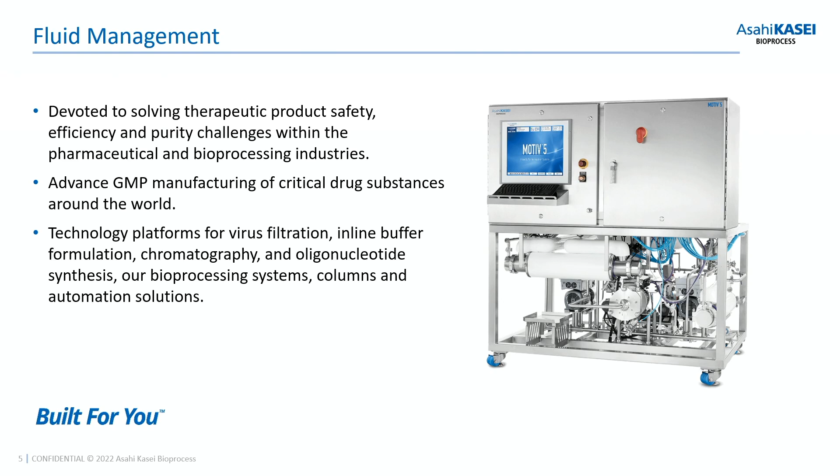We firmly believe that a rising tide lifts all ships, and that's why we're investing so heavily in these collaboration efforts like BioPhorum. The fluid management division is devoted to solving therapeutic product safety, efficiency, and purity challenges within the pharmaceutical and bioprocessing industries. Our goal is to advance GMP manufacturing of critical drug substance around the world, and we do that with a variety of technology platforms, including equipment, but also automation integration solutions.

Oligos are one of the most promising therapeutic modalities for today and the future. AKBA has been supporting oligo manufacturers and developers with equipment from synthesis to purification since 1998. And our aim is to help manufacturers around the world meet this growing demand for oligo drug substance.

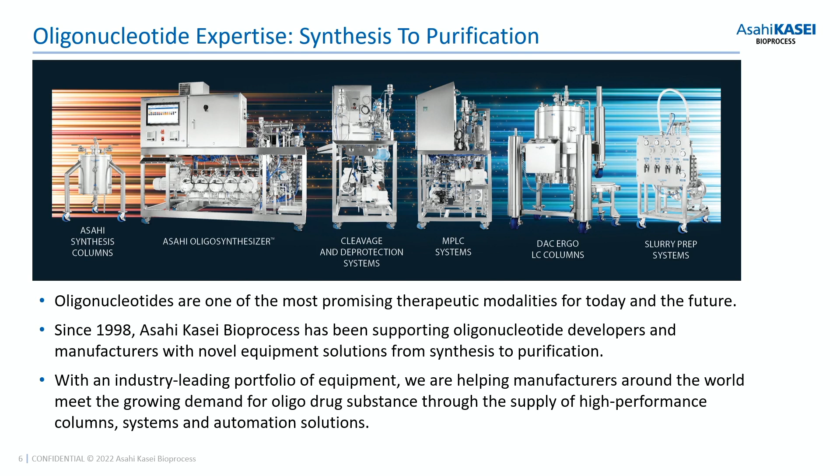We get down to the roots a little bit. Pharma 4.0, coined by the International Society for Pharmaceutical Engineering, or ISPE, is a specific introduction of Industry 4.0 concepts to the pharmaceutical industry. The term Industry 4.0 refers to the so-called Fourth Industrial Revolution, which you might imagine is preceded by the first, second, and third industrial revolutions.

I threw some dates on the slide, but the boundaries of these periods are defined differently by different groups, and that's because, of course, especially in the early technologies, regional adoption is very different depending on where you were. But broadly speaking, we can agree that the first industrial revolution was defined by early mechanization, such as steam power in the weaving loom, the second by mass production with the assembly line and electrical energy, the third by automation and electronics, and the fourth and current industrial revolution by the Internet of Things and broad-based networks.

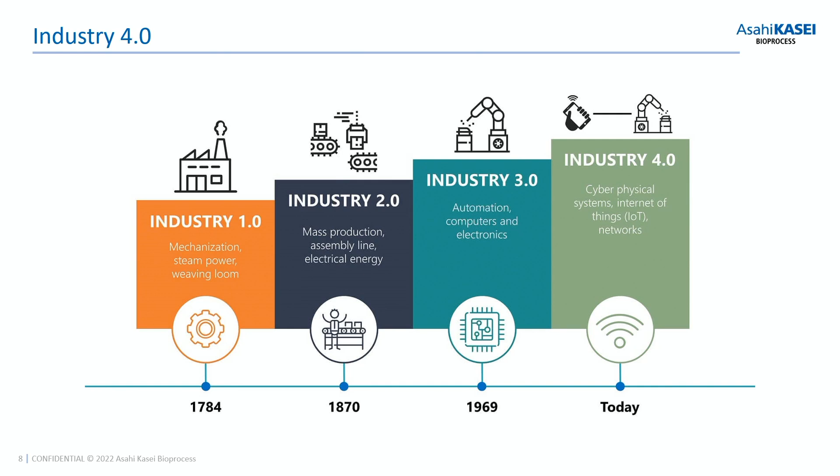Pharmaceutical production based on Industry 4.0 factory design really becomes Pharma 4.0 when these ideas are applied to GMP validation and GAMP requirements. Pharma 4.0 is not a product, but rather a framework that consists of many elements and enablers. The elements here being resources, information systems, organization and processes, and culture, and enablers being digital maturity and data integrity by design. This operational model is applicable to processes all the way from initial product development up to commercial manufacturing.

It's important to note that this digitalization effort, while it uses a lot of IT jargon, is not an IT project. It's really important that this project is a project for your entire organization. This model requires information exchange both vertically and horizontally throughout your plant, and that means that all departments and stakeholders need to be involved. They really need to collaborate to properly identify your CQAs, critical quality attributes, and your CPPs, critical process parameters, which are tenets of the ICH Q10.

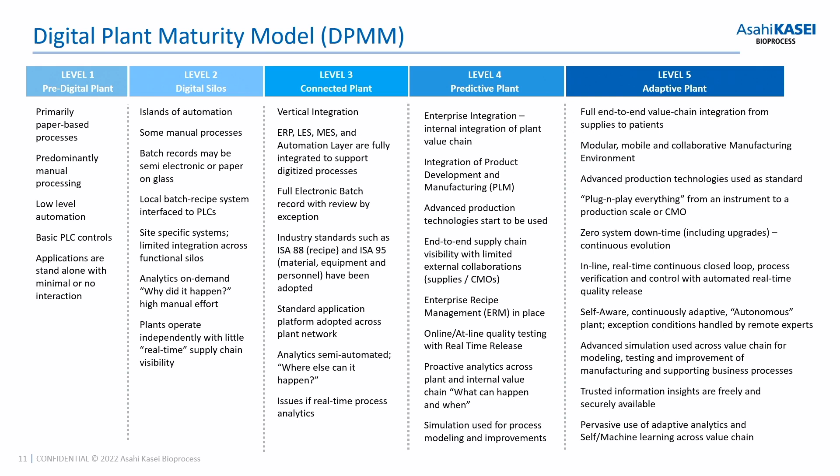It provides a great summary of some different levels of digitalization that we see across the industry, and that might be helpful for you to evaluate where your plant currently stands and where you want to be. And maybe that goal is a level 5 totally adaptive plant, and maybe it's not.

As we look at those levels, 1, 2, and 3 are easily recognized, I think, for most of us. Moving from paper-based processing to islands of automation, and then finally to full-blown DCS control in level 3 with ISA-88 concepts, control of multiple unit operations, et cetera, as are elements of level 4, such as inline quality testing, process simulation and modeling, and things like that. As such, you might not be surprised to find that BPIT conducted a survey, and they found that most pharma companies are at level 2 or 3 and incorporating some elements of level 4.

Of course, before we propose a digitalization project, we have to understand what the benefits are. I've summarized a few here. The first being quick access to data and real-time reporting, which of course supports your critical management decisions. This technology is intended to support your workforce. It helps with operator training, it reduces human error, and it gives them the information that they need to identify issues and gives them feedback, for example, to the maintenance team to minimize downtime. It helps minimize data loss with robust backup technologies, which helps you prevent throwing away good product.

Another key point, it prevents equipment obsolescence. Right now, a lot of equipment is made obsolete because it applies to a bespoke product, or it relies on institutional knowledge about the process or about the equipment. That means that if those people move up in your organization or they leave your organization, it leaves you reeling.

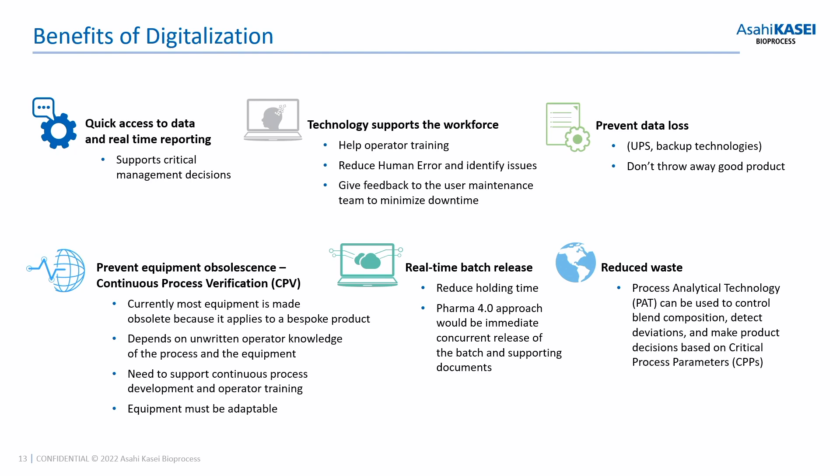I think that automation is easiest to identify in terms of a benefit at the process level throughout existing plants. Processes that were formerly manually done are now being automated, and even very simple unit operations have a huge benefit to automation in the fact that you have data continuity and continuity of reporting. So even though that might not save you that much time in that unit operation, it does enable you to take the same electronic batch report approach, all the same reporting approaches that you have in your surrounding technologies that might be more complex, and that can really save you time in analysis and QA, and it supports your customers' need for the data.

I want to pick on a few technologies that I think are overlooked, specifically in the oligo industry. The first being cleavage and deprotection. Currently, the liberation of the oligo is often done manually or with repurposed equipment. Deprotection is often conducted manually also in a standalone vessel. Already, synthesis, purification, concentration, lyophilization, those steps are automated in most plants, leaving C&D as a gap. This is a gap that AKBA intends to fill.

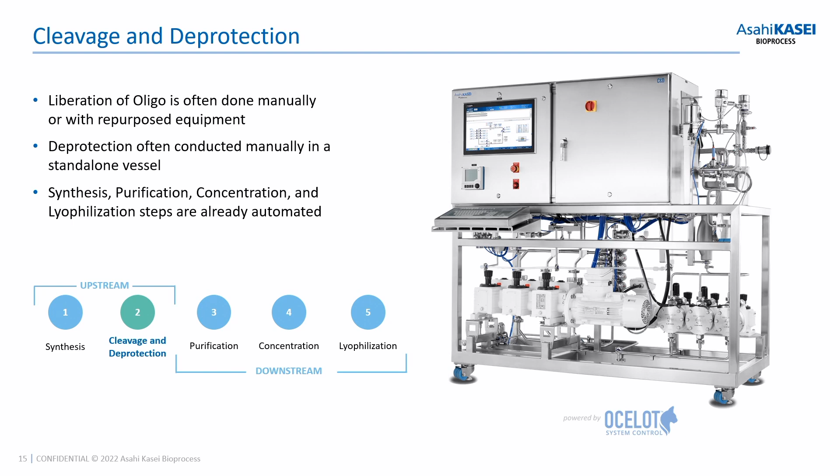We already have a number of C&D systems installed, and we're working to make them better with your feedback as we go along. Chris Oswald mentioned in his talk earlier this week the importance of controlling the dosing rate during the TBDMS desilylation reaction. Automating this process enables precise control of this rate. It enables you to minimize the reaction time while staying under safe temperature limits, and for many people, those are both critical process parameters.

Next, buffer formulation systems are an easy way to advance the automation of your plant. They allow you to produce large quantities of buffer with a small footprint and in very short amounts of time. Additionally, buffers can be produced on demand to meet the needs of your surrounding equipment. In fact, a single buffer formulation system may be able to supply your entire line with buffers, or at least several unit operations, and can do so without operator intervention.

While buffers are the focus of this technology, I think it's worth noting that these formulation systems can also be used for solvent blending and delivery and control of the supply to your tanks throughout your plant.

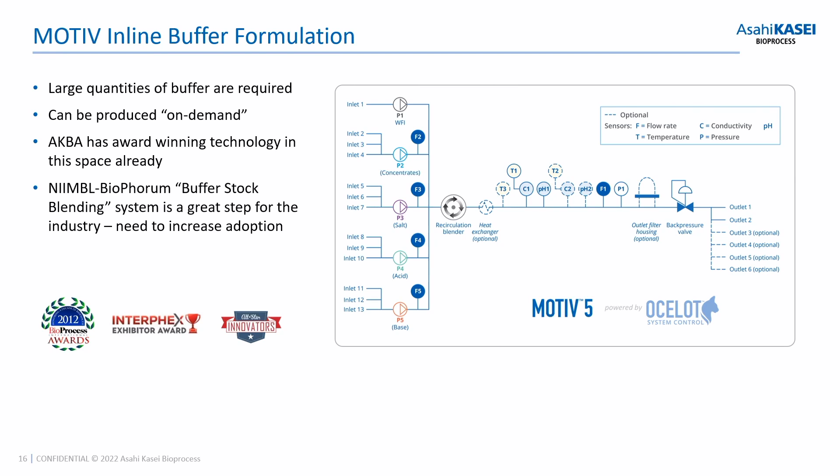AKBA has long been a staunch advocate of buffer preparation technologies for over a decade, and this includes our MOTIV technology, which was formerly called IBF, and we're really excited about some recent industry adoption of this process and the traction that was gained by the NIIMBL-BioPhorum Collaboration Skid, buffer stock blending skid. I'd encourage you, if you haven't seen it already, to check out some of the white papers that they've put together, and they have some quick informational videos about the product as well.

A broader technology that I think is underutilized is PAT, process analytical technology. An easy example here is inline conditioning of buffers for your TFF or your chrom processes. A significant portion of our customers are still using mass flow and other basic control mechanisms, ending your step based on a fixed volume or your fractions based on a fixed volume. That's fine when those basic criteria do really define your process, but it is prone to operator error. For example, if you have an improperly mixed stock solution, you're going to have an improperly mixed product after you do a mass flow blended recipe.

The Pharma 4.0 approach is to then identify the critical process parameters for your batch or your continuous process and allow the automated system to control them, or at least to make decisions based on them. A widely adopted example, of course, is fractionation by UV signal. I think we all expect that that's how you're going to use that piece of equipment, but there are boundless opportunities remaining. Perhaps a detection of a failed coupling based on some process indicators.

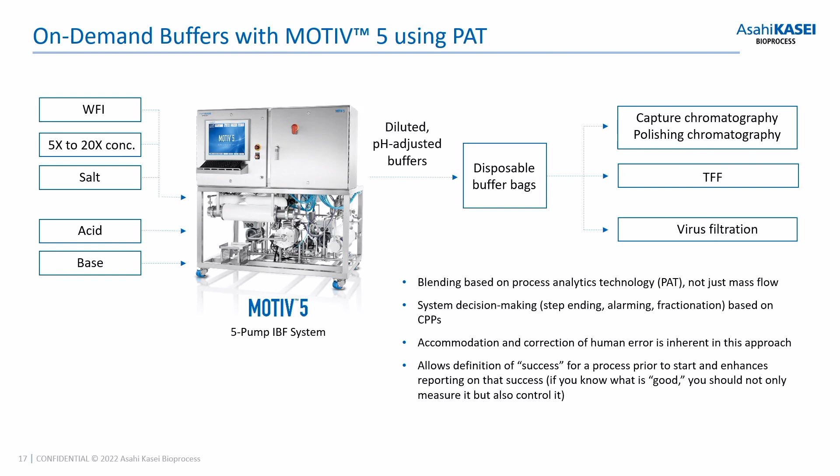As an OEM and a technical solutions provider, our role then is to provide you the options and the tools to identify these things. Flexibility is key because, as I said, you're going to learn new things about your process as you go, and you need to be able to act on that knowledge to be able to capture a benefit.

Now I'll talk about some newer technologies in our OCELOT System Control platform. I think to support the idea of data integrity by design, it's important that we understand the underlying architecture. We can adapt to a number of different plant designs, but here's a peek under the hood of our basic setup. On the IT side, we're Windows 10 Enterprise based. That means easy interaction with Active Directory, time synchronization, network printing, scheduled backups, etc. On the OT side, we use Allen Bradley CompactLogix PLCs, which are very integration friendly.

We provide an option that we call OPC ready, and with that option we provide either a dedicated Ethernet port at the PLC or an OPC UA server at the SCADA PC. That means that we're ready to plug into your PI system. Your historian can collect directly from our PLC or from that OPC UA server. We're ready for controller supervision from your DCS or direct messaging with other PLCs, Siemens via Modbus TCP, DeltaV via VIM2, et cetera. And that might be a little bit more relevant for just a single piece of equipment that you're trying to integrate with, but still interesting.

More on OPC ready. I think that often when we're thinking about connecting technologies, we really focus on the point of connection. But what really enables this technology is all the underlying architecture. And for us, that means that we have a standard and modular data and tag structure for all relevant information. That means that I, as an automation engineer, can look at a P&ID that AKBA has provided you, and I can tell you all of the different registers in that UDT that might be interesting to you for integration without ever looking at the code. They are modular, they look the same for every process value, and that makes it really easy to integrate.

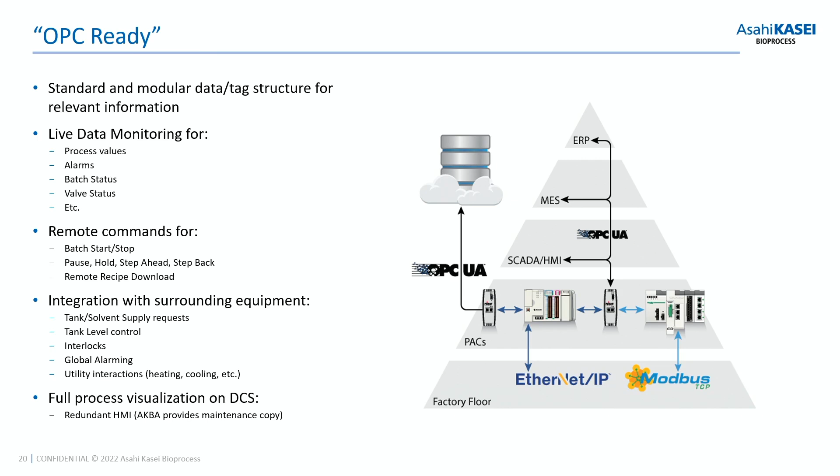Finally, we can support full process visualization on the DCS, basically a redundant HMI. We'll still give you an HMI for internal testing and commissioning, but if you have everything on DeltaV and you want your operators to look at a system on DeltaV, that's fine. We're going to give you all the information that you need to recreate that HMI.

On the IT side, as I mentioned, we're Windows 10 Enterprise based. What that means in a little bit more detail on Active Directory, all of our process control privileges are based on Windows user groups. And so your Active Directory users can be used with our system without any additional synchronization. We do time synchronization as well. We use the Windows time as the master for everything. So if you have an NTP server, all you have to do is update the Windows time, and everything throughout our process control software updates as well.

We store all of our data in standard formats. I mentioned the OPC UA access to live process data, but then overarching data like recipes, overarching batch status, audit trail, alarms and events, et cetera, are in a SQL database. So if you have a PI system set up, you can connect and grab that information via RDBMS, or you can just replicate this on your SQL server. We provide all of that information to you. And then if you choose not to integrate, we can export that information or create reports in both PDF and CSV formats. All of those are configurable by the user, so you can really customize the information that you want.

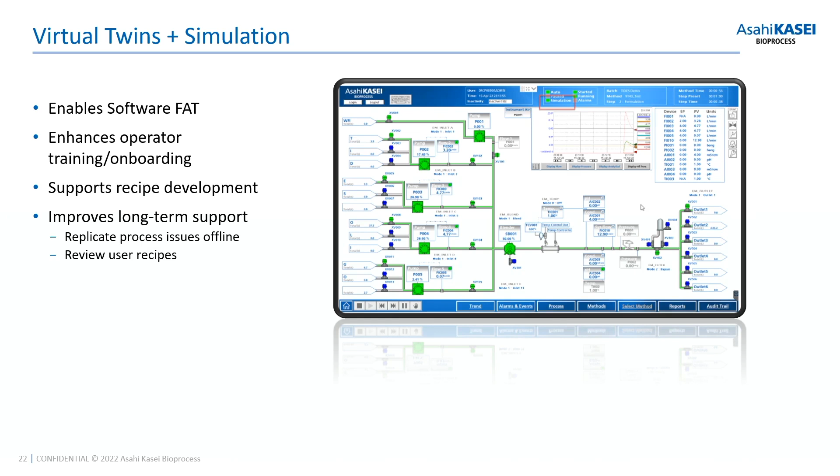You can do parallel operation. There's no licensing. It's available to all the devices on the same LAN or VPN, and that means that you can be sitting at home in your shorts at your home office and editing recipes without having to gown up and go into the clean room, depending on, of course, your IT infrastructure. I like to say that it uses kind of a Google Drive concept where we can have concurrent editing.

You can have one user logged in at the skid. You can have another user logged in with their own credentials, editing recipes, etc. The one place where we deviate from that is that, of course, we have to be 21 CFR Part 11 compliant. So if you're making edits to a recipe, you've checked it out. It's not available to any other users.